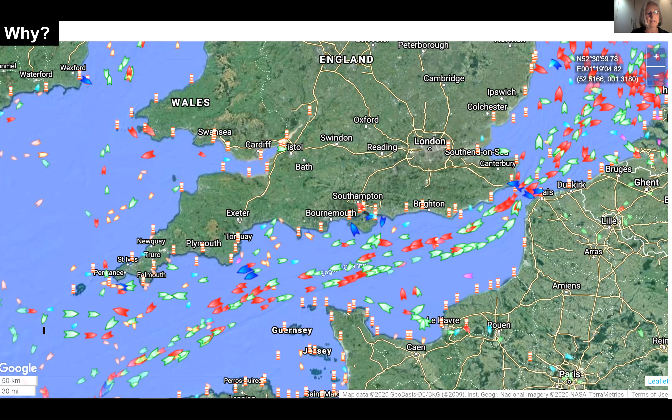So what are the pieces of the puzzle? We are considering 6 lighthouses built in the second half of the 19th century, all in the care of Trinity House, an organization set up in the UK now 500 years old, with the aim of controlling and managing commercial shipping.

The lighthouses were built with dovetail granite blocks, and they were very good, but they also have a very complex structural behavior.

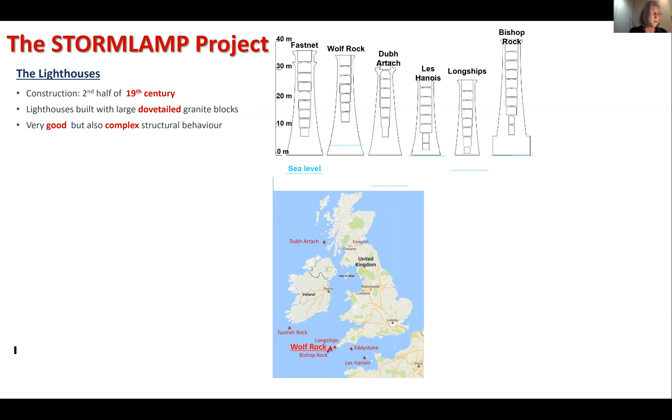With colleagues at Plymouth, I've used statistical tools, theoretical models, and experimental work to determine the interactions of the magnitude of the waves and their interactions with both the bathymetry and the rocks, and the structures built on top of these outcrops of rock at sea.

Together with this, on-site investigation was conducted for each lighthouse by Exeter University teams to identify their structural and dynamic characteristics, which are fundamental to the development of individual structural models, developed at UCL. Among other things, I hope you can see the right-hand side of my pictures - in case this was on top, I just removed it.

Among other things, they have installed long-term monitoring on a number of lighthouses so that in future we can actually capture strong events of wave breaking on lighthouses.

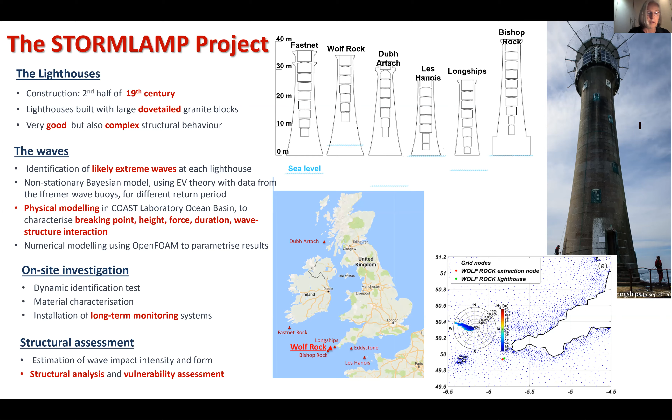The behavior of lighthouses cannot really be understood without going back to the Smeaton Eddystone Lighthouse, built about a century before the ones we'll be speaking about tonight. Smeaton's ingenuity should be seen not just in terms of its particular creation, but in relation to the fact that in the previous 150 years, there were only failed attempts to install durable lighthouses on various shallow rocks in the English Channel. In the following 150 years, this lighthouse survived until it was removed to shore in Plymouth harbor because the rock had actually failed.

So, what were the innovations of these structures that made them such an engineering success, and so long lasting?

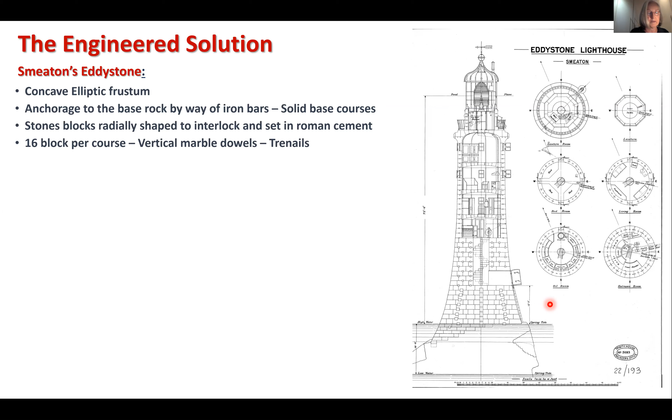First of all, the concave elliptic frustum, the iconic shape that nowadays we all associate with lighthouses at sea, was Smeaton's idea. Another very important idea was the anchorage of the base rock by way of iron bars and solid courses which could not be washed away by waves. The stone blocks were radially shaped and interlocked, and very importantly set in Roman cement.

Roman cement is what we nowadays call Portland cement, or just cement, the base of modern concrete and reinforced concrete. At the time, it was entirely novel, the possibility of setting in water, and particularly in salty water conditions.

Stone blocks were also connected to each other by way of marble dowels, which you can see here in red and pink, and wooden pegs which would connect one course to the next.

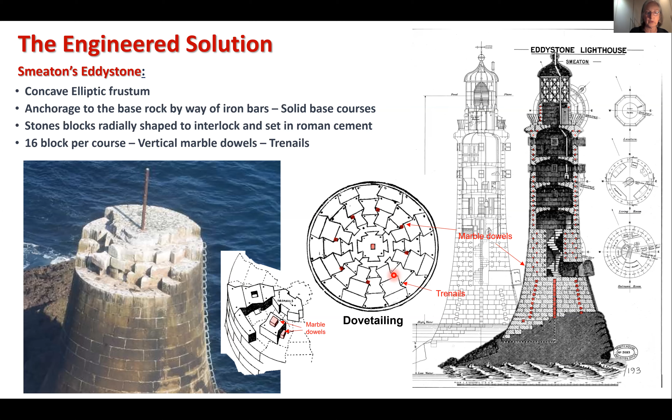In the rest of the talk, I will concentrate mainly on Wolf Rock. Wolf Rock is just outside the coast of Land's End, some 20 miles southwest at sea, where there is this red dot here. Trinity House planned to build a lighthouse there since 1790.

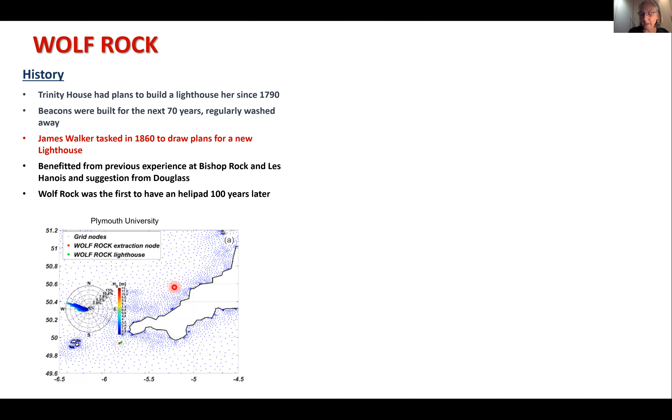However, in the intervening 70 years, a number of beacons were built, but they were regularly washed away during the stormy season. The last of these beacons, which you can still see in this picture, was built by an engineer called James Walker, who was head of engineering at Trinity House and later became president of the Institution of Civil Engineers. He was tasked in 1860 to draw plans for a new lighthouse.

He benefited from already having engaged in lighthouse building at Bishop and Les Hanois, which were in slightly more sheltered conditions, but also a smaller enterprise. He also benefited greatly from suggestions from his predecessor, Mr. Douglass, who had contributed to building Longships and also Bishop Rock.

Wolf Rock was also the first, 100 years later, to receive a helipad, a means for helicopters to land directly on the lighthouse for maintenance purposes and to bring supplies to the lighthouse keepers.

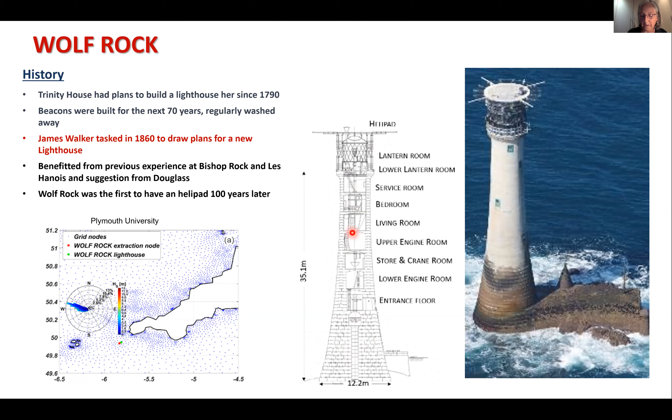How could we build, and how can we study, these structures? We have a wealth of archival information that has come to us through Trinity House and the Institution of Civil Engineers.

The study of this information reveals important improvements to the Smeaton blueprint made by both Walker and Douglass. The most important improvement was in relation to vertical dovetailing, but also the fact that they changed the timber pegs for galvanized bolts connecting the lower courses.

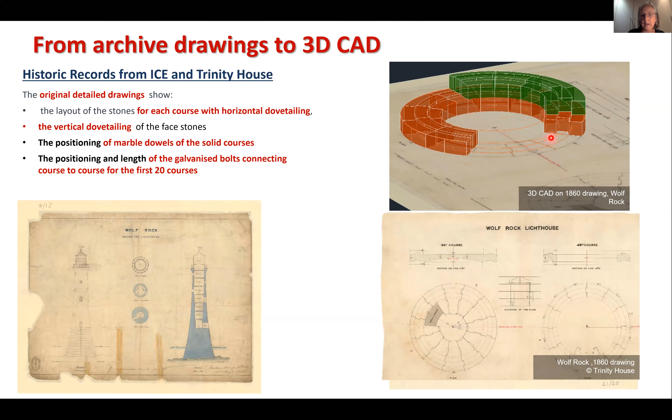The wealth of information we have, which consists of very detailed drawings of each single stone for each single course, allowed us to build 3D CAD models representing each stone in each course, up to determining the whole geometry of the structure. This, of course, allows us to take a very important step towards analyzing the behavior of the structures.

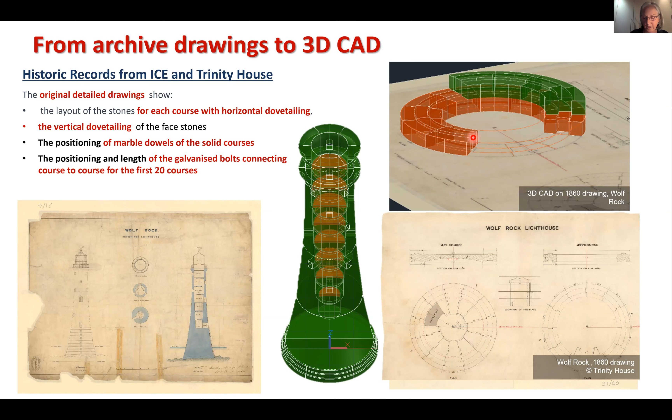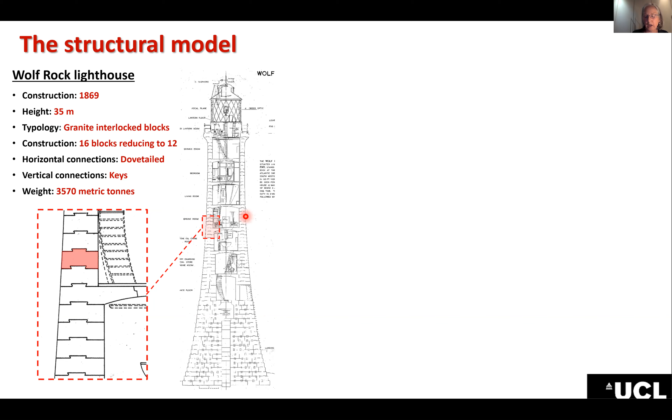However, in building the structural model for a lighthouse which is 35 meters high, made of granite interlocked blocks, with a construction of 16 radial blocks reducing to 12 at higher levels, this creates very complex shapes and geometry which are sometimes difficult to reproduce in a mechanical model. In engineering, we use either finite element models or what we call discontinuous models, which is what I will talk about in a minute.

One key important element here is the fact that although these stones are set in mortar, the mortar is much weaker than the stones themselves, and they are almost dry joints after 150 years.

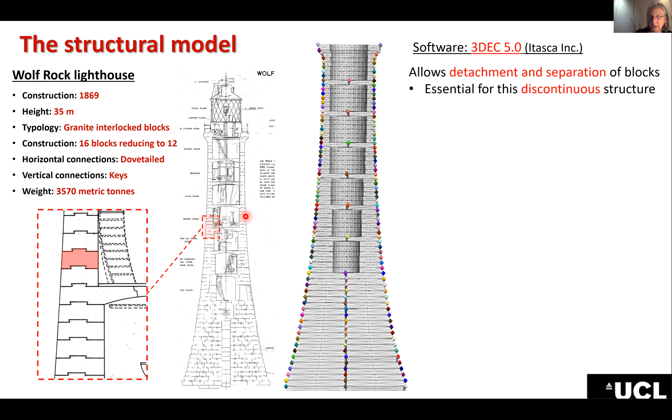So in fact, the stones are able to move and detach from each other. Therefore, it is important to simulate that detachment and separation of blocks in order to explain the actual behavior of the structure. For these reasons, we decided to keep the modeling of each of the blocks as a separate entity, but concentrated on the vertical keying that I had introduced earlier.

Without particularly introducing also the marble dowels or the dovetailing in the horizontal range. This is because while the dovetailing in each horizontal course is fundamental during construction, once the ring is completed it will act almost as a unique object, and hence we don't need to model that separation so much, and we can simulate it with a simpler geometry, another trick of building mechanical models.

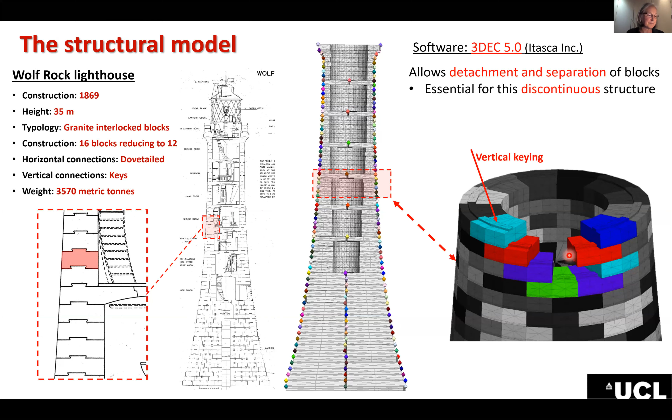What creates the forces is not so much the water breaking on the lighthouse, but the compressed air preceding it. So it's important to identify the area of impact, and it's important to understand how the lighthouse will react to such impact.

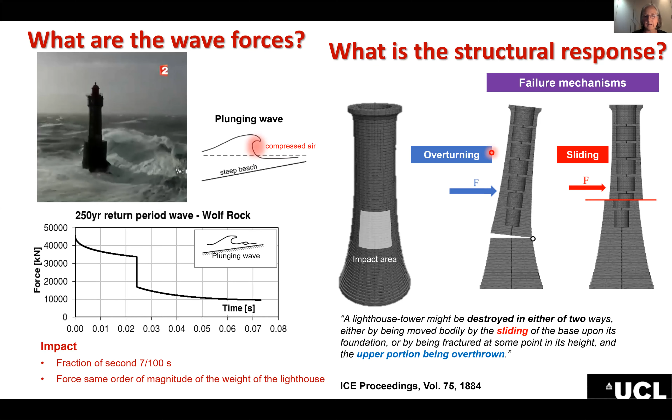So how can we represent this from a numerical point of view? We can use what we call limit analysis to calculate the critical uplift, assuming that this is the way in which the structure will respond. Sliding is typically prevented by the vertical key that we have seen before, so the most likely possible way of failure is the rocking.

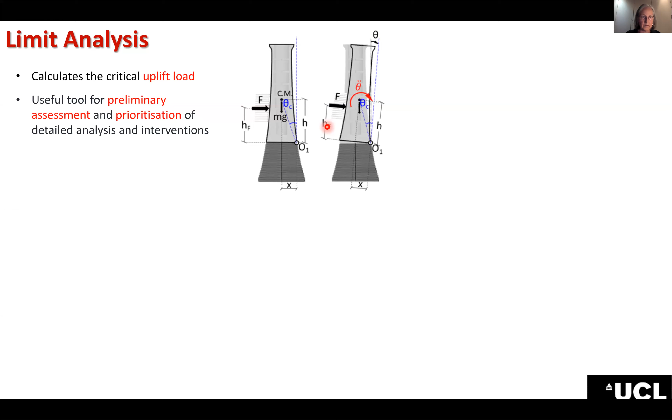However, what we know is that the behavior, once it starts rocking, is much more complex than just rocking around one point. Given the distribution of inertia of the lighthouse, the behavior is such that there will be more than one hinge, with at least two portions rocking relatively to each other, forth and back. This is not easily studied with an analytical model; equations can be written, but they cannot easily be integrated into a solution found for each instance of the rocking.

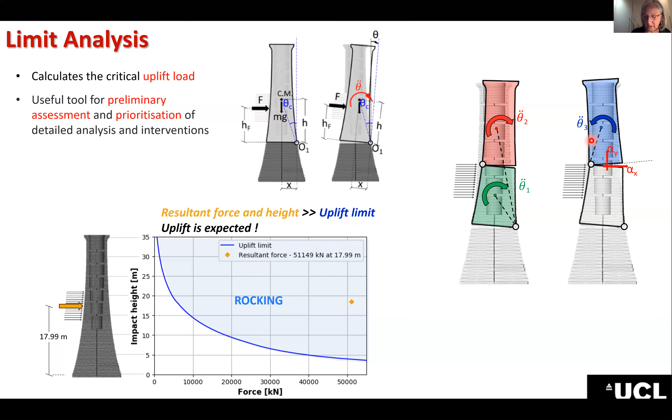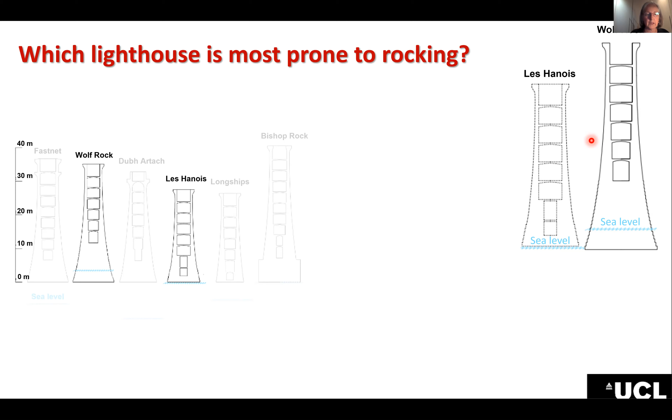That's why we have resorted to the numerical model that I mentioned before. Before looking at that in more detail, however, it's interesting to think about which of the lighthouses is most prone to rocking, so we can determine which needs more concern. To do this, we compare Wolf Rock and Les Hanois, because they are relatively similar, although their scale is quite different in size.

If we look at that blue curve that I identified before, reported here for Wolf Rock and then for Les Hanois, we can see that Les Hanois has a much smaller area of safety with respect to Wolf Rock. We can also see that the base of the tower is much shallower.

However, and this is the impact wave that we have considered earlier, so just for reference.

However, if we then consider using a non-dimensionalized approach, i.e. we divide the height of impact by the height of the tower and the force of impact by the weight of the tower, we find out that the two curves almost coincide. But of course, the force has a different proportion with respect to the curve. And again, Les Hanois appears to be at greater risk for that level of wave and application and point of application than Wolf Rock would be.

But what is interesting here is the fact that the two curves lie on top of each other, which means that Douglass had actually designed all of this building in almost a parametric way in very modern terms, and they were able to scale them up and down to basically determine very similar performance. This is a very modern way of thinking about structures.

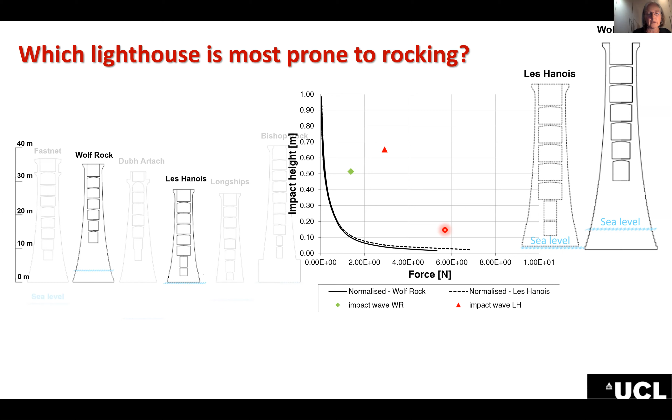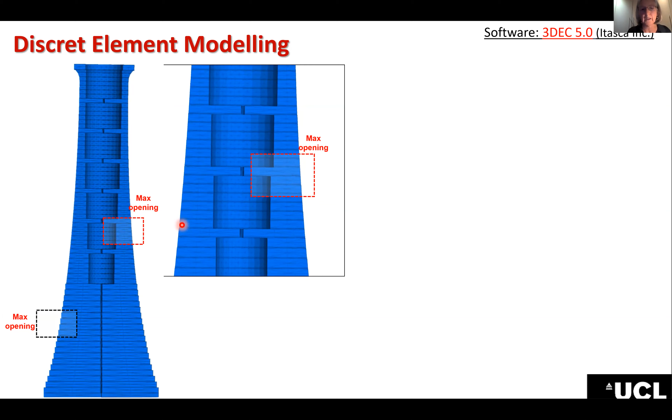Let's go back now to the modeling and look at what happens when the force is applied to the lighthouse. You can see the opening of some of the joints here, and at the same time in the lower part. These openings will be on opposite sides of the tower, so on the windward side and on the leeward side, respectively.

What is interesting to see is that the actual opening doesn't occur only on one joint, as we had assumed in the simplified model, but it occurs on a number of joints, as we can see reproduced here, which means that for each of these uplift and downlift events, there will be friction between the stones, and there would be rocking occurring and dissipation of energy. This dissipation of energy is actually extremely important in making it so that the wave has a much lesser impact than it would otherwise, if the response of the structure was purely elastic, if all the stones were solidly connected and the lighthouse had to perform as a simple cantilever.

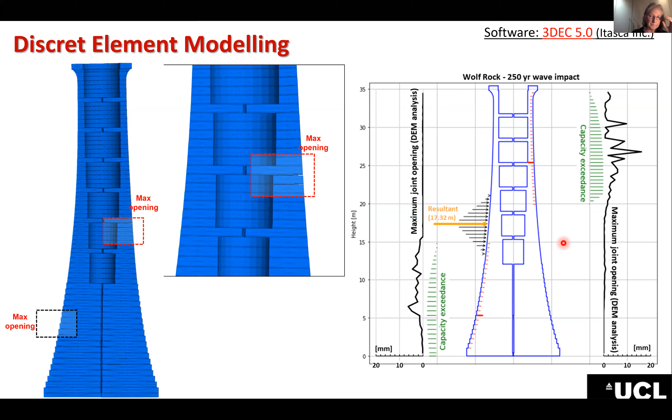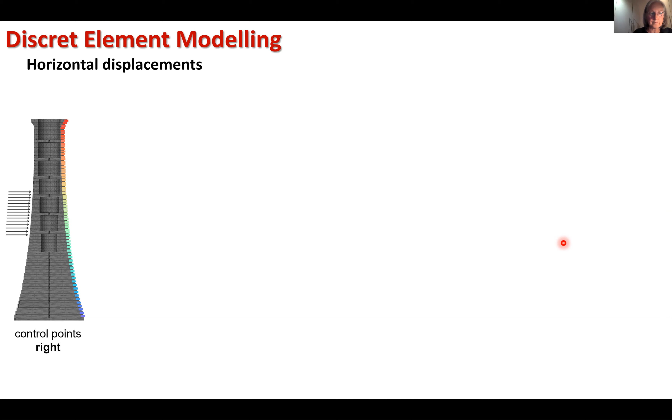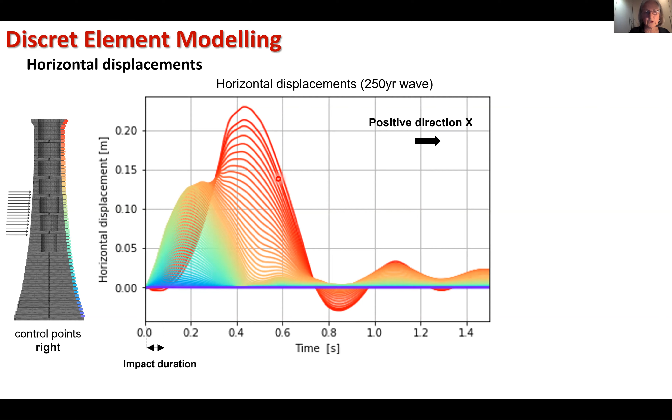But are these impacts critical for the lighthouse, and would they take us to failure? So let's first look at the horizontal displacement. Here we can see that for the period of impact, the upper part of the tower has a negative displacement, so it goes backward, and then it comes forward again after the impact is over, and has a total horizontal displacement of about 23 centimeters, 0.23 meters.

The effect of the dissipation of energy is such that the next crest is only 0.04 meters, or 4 centimeters. So there is an 83% reduction of that movement. And this is critical, because within the time of 1 second, this basically makes it so that the next incoming wave, if it's of a similar magnitude to the previous one, will find a structure that is again at rest and ready to take the next wave, rather than a structure that is already deformed, and hence the effect of the train of waves could be cumulative.

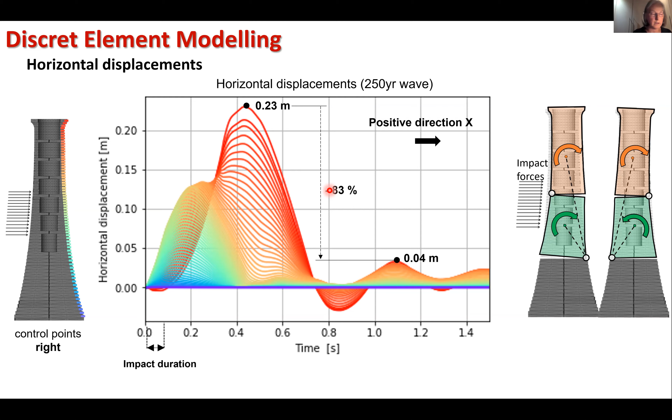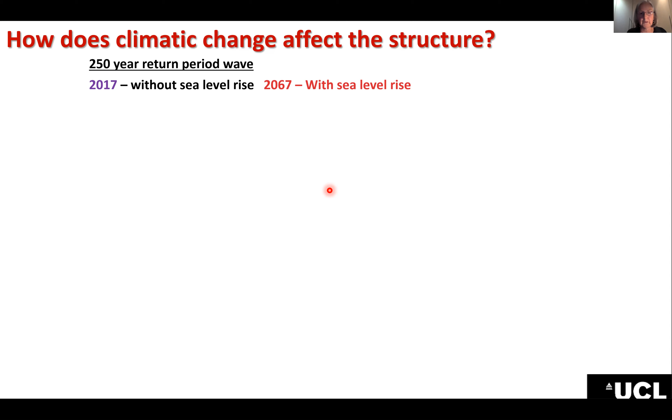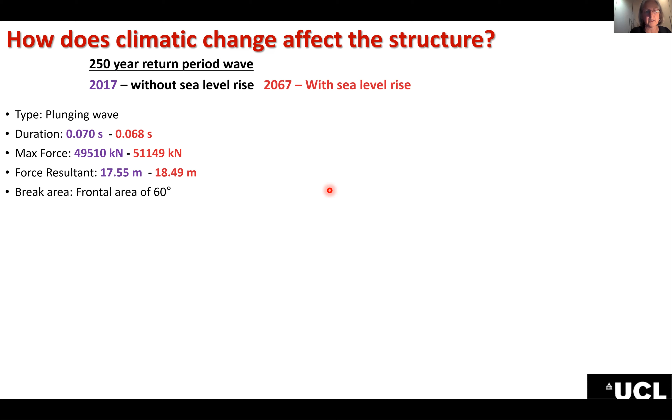And slightly higher up on the force resultant point of application. The type of wave is the same, and we can see from the analysis that we have an increase in the total vertical opening of about 20%. So although the wave is not very different, there are of course uncertainties in relation to the magnitude and positions and all the parameters that characterize this wave.

If we make comparisons, we can see that the actual result is much greater, and this has to do with the fact that the wave will hit higher up on the lighthouse.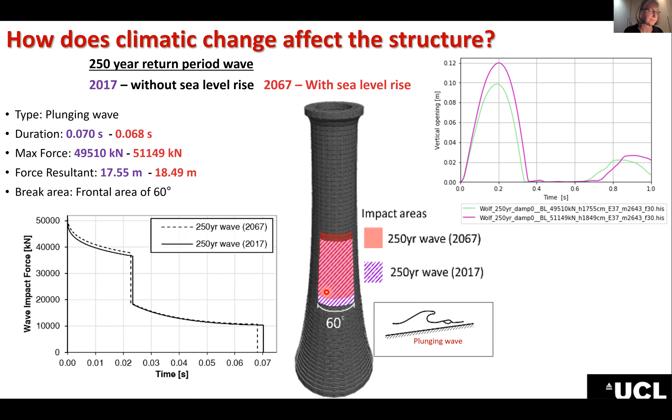What does that mean for the single joints, and again, will that mean that we will have failures of some of these joints? So here we can look at the actual displacement of each joint, which is about 2.3 centimeters, or 23 millimeters, for the case of 2017, and about 25 millimeters for the case of 2067.

It's interesting to correlate this with the depth of the vertical keys, because remember, it's the vertical keys that are preventing the upper part of any joint from sliding relative to the lower one. Therefore, the fact that this total opening is smaller by a factor of 3 compared to the actual height of the key means that they will not be sliding, and that as long as the wave has a relatively short period of impact, the structure will still be safe.

And it's interesting to see that the factor of safety here is quite high. Indeed, it's about 3 times. So again, if we think about the design of these structures, they were definitely very well thought over.

In conclusion, the use of historic information is fundamental to build an accurate, advanced numerical model that can really represent the behavior of the structures. Of course, we have many uncertainties about the actual wave actions, because this is a probabilistic and random magnitude and intensity of impact.

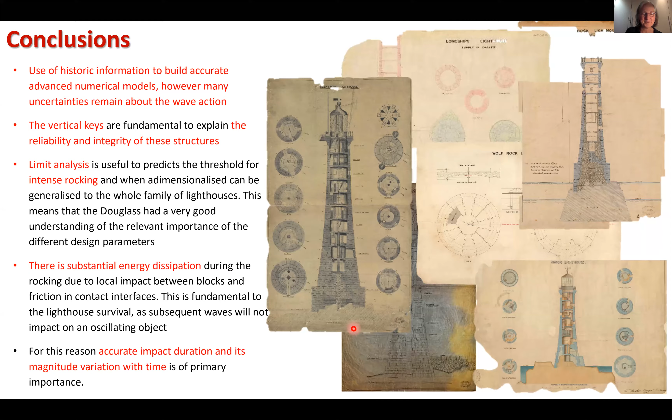Thank you very much, Dina. This has been fascinating. I like how this project has many of the key elements of heritage science projects, in the sense that it involves an element of historical understanding with engineering principles. And I found this interaction super interesting.